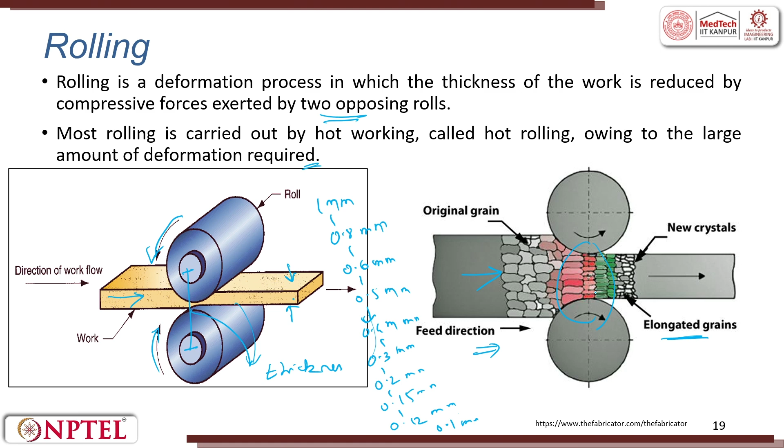This is the deformation zone. When the material comes out, you get elongated grains, and new crystals also get formed.

In rolling, the material is pulled by rotating rollers and simultaneously squeezed between them. So there are two actions: pulling and squeezing.

Hot rolled metal is generally free of residual stress and has isotropic properties. The disadvantage of hot rolling, as we've seen, is that you cannot get very close tolerances, and there's a possibility of oxides forming.

Why do we talk so much about this? Because the oxides that form are brittle in nature, and they form on the top surface. Since the oxides are brittle, the next time you try to roll this material, the oxide layer will easily crack, and this can scratch both the roller and the workpiece. So oxidation scales should be avoided.

This becomes very common when we start working on hot rolling. For steels, the desired temperature for rolling is around 1200 degrees Celsius.

The heating operation is called soaking, which we saw in the previous chapter on heat treatment. The furnace in which this is carried out is called a soaking pit. Blooms, slabs, and billets are different types of workpieces produced in this process.

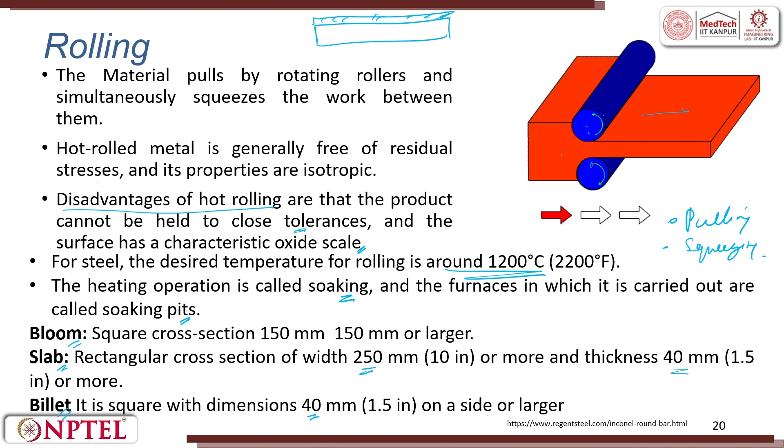So this is a bloom, this is a slab, and this is a billet. From this, by a rolling operation, you can try to produce I channels. We can try to produce railway tracks. So how do you do that? If you try to do the cross section area...

This is the roller. When you look from the side, this is how the roller looks like. When we look from the front, you will see they will have something like this, the roller. So this will try to bring this structure. The roller cross section is changed so that you try to get the required output.

In slab, it is straightforward. So rails are made from bloom by a rolling process. Then from slabs you can make coils, plain sheets, all these things. Billets are used to make bars and rods.

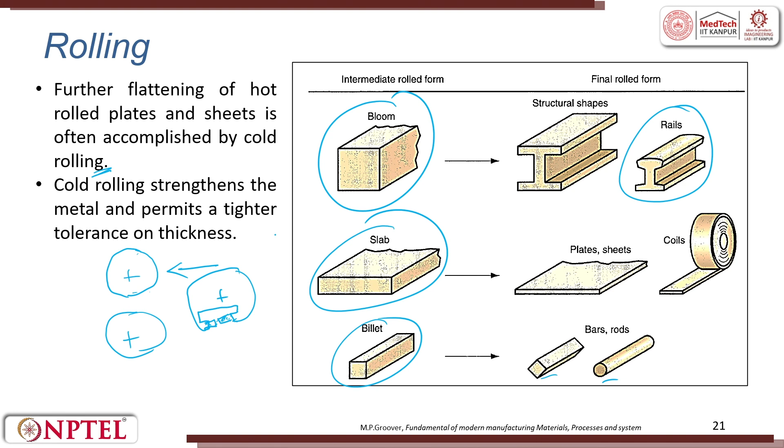Further flattening of hot rolled plates and sheets is often done by cold rolling process. Major change in shape is done by hot rolling, and then further you can do it in cold. So cold rolling strengthens the metal and permits thinner, tighter tolerance on the thickness.

Rolling did not happen just now, it has a history. The rolling of gold and silver by manual methods dates from the 14th century. Leonardo da Vinci designed one of the first rolling mills in 1480, but it is doubtful that his design was ever built. Around 1600, the cold rolling of lead and tin was accomplished by manual operation of a rolling mill. In 1700, hot rolling of iron was being done in Belgium, England, France, Germany and Sweden.

In Europe, it typically happened that these mills were used to roll iron bars into sheets. In the modern rolling practice, dated 1783, a patent was issued in England for using a grooved roller for producing iron rods or iron bars. The Industrial Revolution created a tremendous demand for iron and steel, simultaneously driving the development of the rolling process.

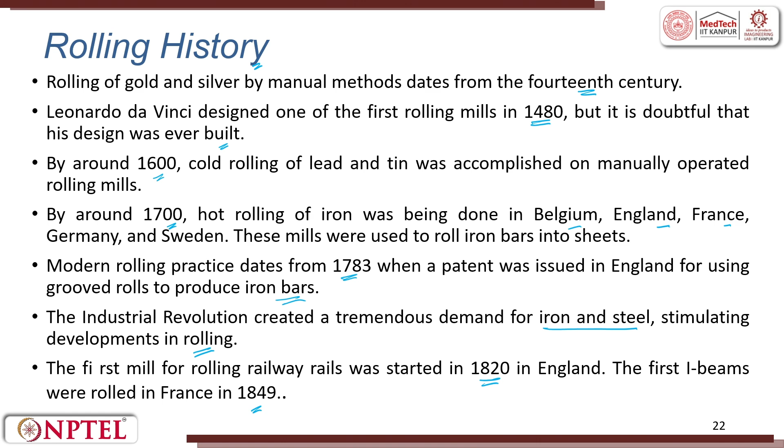The first mill for rolling railway rails was started in 1820 in England. The first I-beam was rolled in 1849 in France. So you see casting had a very long history, starting from BC and continuing into AD, but rolling started with evidences only in the AD period.

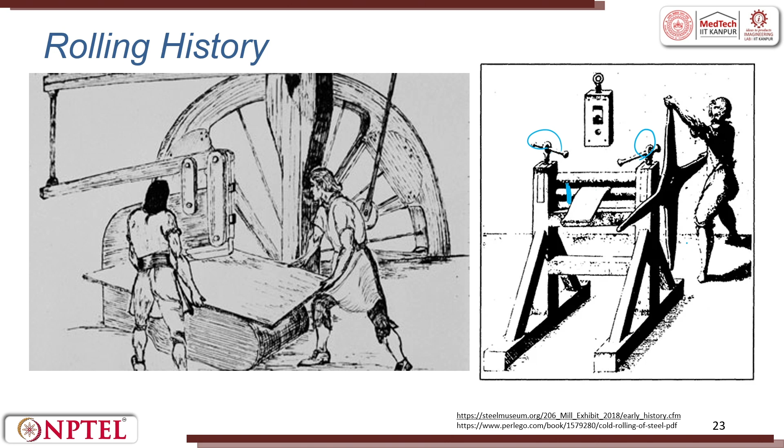So this was the initial roller which was there, and this is the little advancement we have. So you had a flywheel. This flywheel is rotated to give a huge impact. So that is done, then rollers were also developed. Even today, when we want to do sheet bending operation, we have these two arms which can reduce or increase the spacing here, and then we try to apply load manually and get the output done.

When we talk about flat rolling, it involves the rolling of slab and sheet. So this is a roll, this is the input material height, this is the width. V naught is the velocity with which it is pushed inside, Vf is the velocity with which it comes outside. H naught is transformed into Hf, W naught is transformed into Wf. So the moment there is a reduction in the thickness, there will be an expansion in the width. V naught and Vf will not be the same.

When we try to look at further details, this is the roll we have, which has a radius of r. The velocity with which the roll rotates is called Vr. And there is an angle which we have marked here, this is called the bite angle.

Bite which chews and pulls it inside, the bite angle. You can see here there is an entry zone and an exit zone. Here you can see tensile and compressive loads being applied at this point. The distance from the entry to the exit zone is called the rolling gap L. In between, from entry to exit zone, you have a point called the no slip point. So, entry zone, exit zone, no slip point, and then you have a rolling gap of L.

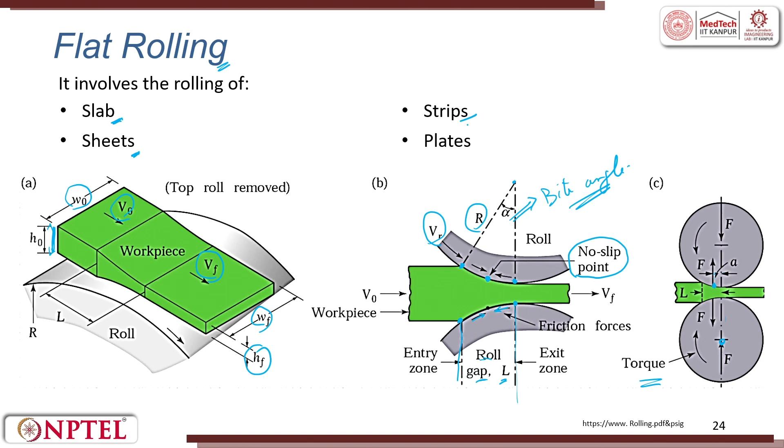Let's do a little analysis. In flat rolling the work is squeezed between two rollers so that the thickness is reduced, and the amount of reduction is called the draft. Draft D is nothing but T naught minus T final, where T naught is the starting thickness and T f is the final thickness. The draft may be expressed as a fraction of the starting stock thickness, so it can be in terms of a reduction R, which is D by T naught.

The increase in width of the work by spreading is called W. We have seen everything here: theta, the rolling radius R, the bite at this point called the neutral point, the roller pressure with which it enters is called P, and then you have a contact length L. The velocity of the rolls is Vr, the velocity with which the component goes inside is V naught, and T naught, TF, VF.

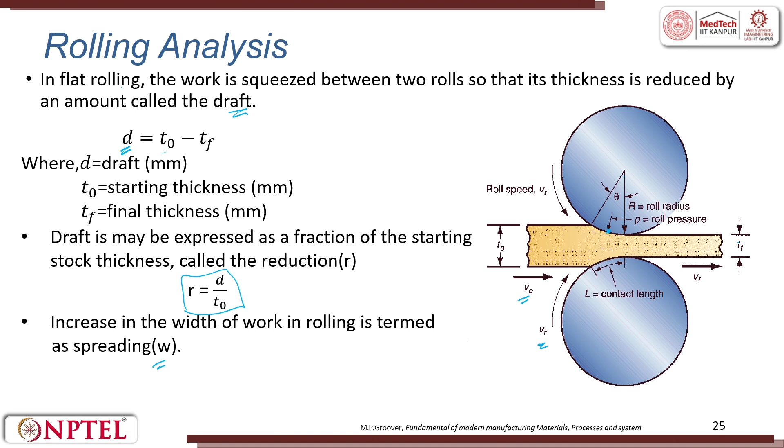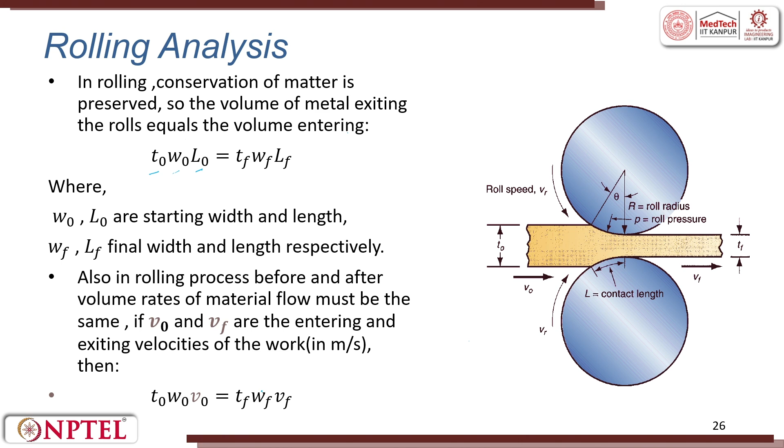Theta is the arc angle made by the roller with the workpiece. R is the radius of the roller, Vr is the surface velocity. V naught will be lesser than Vr, which will be lesser than Vf. At the no slip point, known as the neutral point, the velocity of the work and the roller is equal on either side of this point. The slipping and friction occurs between the roller and the workpiece.

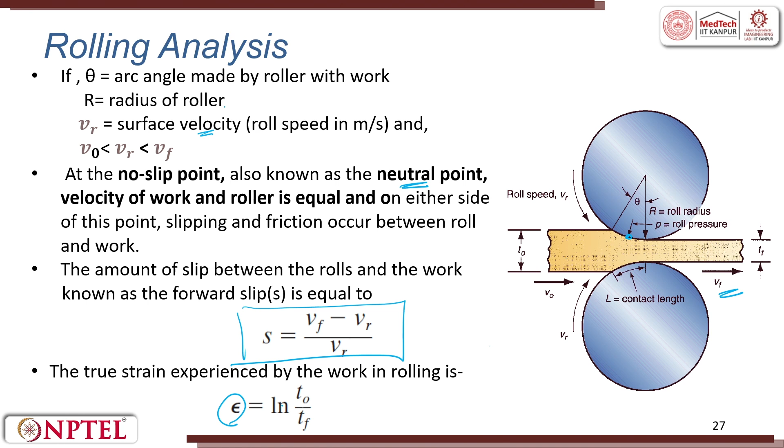The amount of slip between the roller and the workpiece can be evaluated by the forward slip, S, which equals Vf minus Vr, the roller velocity, divided by Vr. The true strain experienced by the work in rolling is strain equals natural log of T naught by Tf.

When we talk about rolling analysis, the friction force in rolling on the entrance side is always greater, so that the net force pulls the work through the roller. So friction force at the entrance side is greater - this is an important point. That's what allows it to be pulled through.

There is a limit to the maximum reduction you can have. D max, the maximum draft reduction in one shot, is equal to mu squared into R, where mu is the coefficient of friction and R is the roller radius. This equation indicates that if the friction were zero, the draft would be zero - it would be impossible to accomplish the rolling operation. So if the friction force is zero, if I put lubricant and bring it to zero, then D max will just slip and nothing will happen.

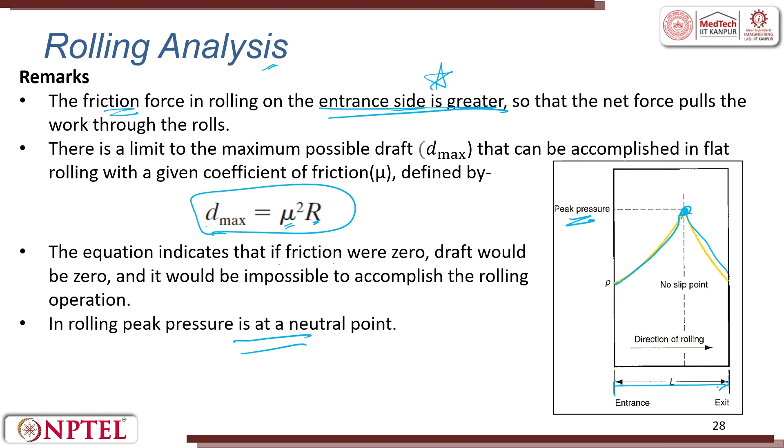The rolling peak pressure is always at the neutral point - this is also very important. At the no slip point, the peak pressure, the rolling pressure, will be very high. This is L - what is L? Start to L, this is the rolling gap that we saw, this is gap L.

So, what are the outcomes? If for a given coefficient of friction and rolling pressure in MPa sufficient to perform rolling, force F is required to maintain the separation between the two rollers. So, F is nothing but W times P, the pressure applied for a small L delta L length.

L is the contact between the roller and the work. Y average is the average flow stress. W is the width of the thing. So, the rolling force can be calculated as average flow stress, which you have seen the formula earlier, width into L. So, here the contact L can be figured out as root of R times T naught minus Tf.

So, the torque will always be 0.5 times F into L. It is a simple calculation. You can try to find out what will be the torque force required for a roller to be given such that it can try to deform.

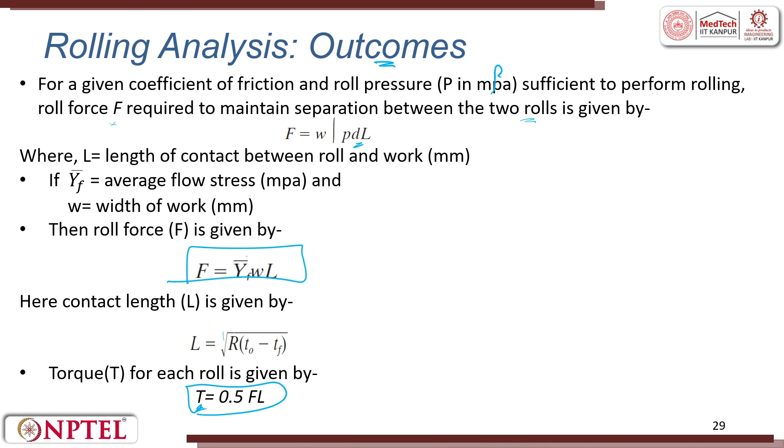So, the power required, we know the torque, from there we calculate the power. So, the power required to drive each roller is a product of torque and the angular velocity 2 pi n. So, the power for each roller is 2 pi n T, and as the roller mill has two powered ones, the power is equal to 2 pi n F L. So, n is the rolling speed. With this, we can figure out what power you should apply for a rolling operation to deform from this thickness to this thickness.

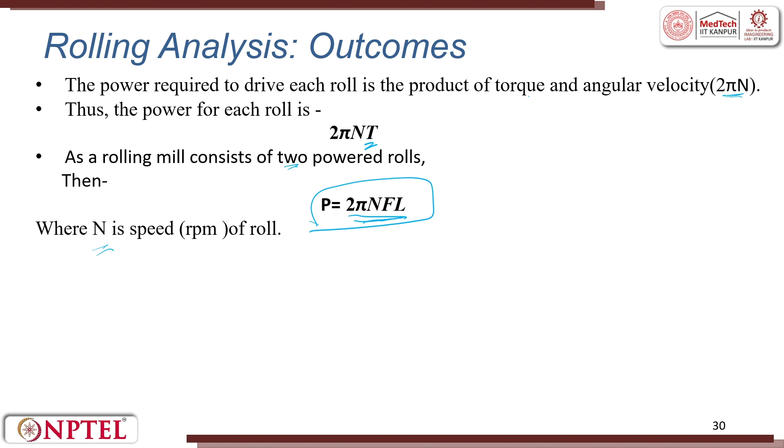As I told you earlier, the reduction cannot happen in one shot. So, what we do is we try to have these rollers in multiples. So, when these rollers are kept, the place where they are kept or the machine is called a rolling mill. Various rolling mill configurations are shown for various applications.

So, in order to see the friction, the draft is equal to mu into R naught. So, there is a limitation on the reduction of this R naught, which is the roller radius. So, that is why we also try to reduce the roller radius, so that you get a draft reduction.

So, the rolling mills can be 2-high, 3-high, 4-high, or a cluster of mills, or tandem - this is called tandem mills. Increasing the rolling mill increases the total force read on the forming sheet.

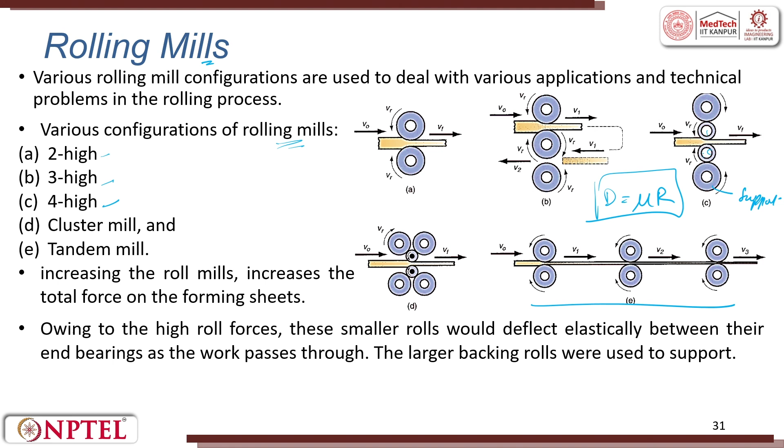Owing to the high rolling force, these small rollers would deflect. So, we have supporting rollers on the back. That is what these rollers are called, supporting rollers. Same way here, these are also supporting rollers.

The rolling process can also make threads. So, in the die, if you have these threads made, a screw is kept there and it is just rolled. So, rolling need not always be cylindrical, you can also make flat ones. If the geometry is given, you roll it in one shot and get the output, a finished piece. So it is used to form threads on cylindrical parts by rolling between two dies. It is also used for mass production of external threads. This is thread rolling.

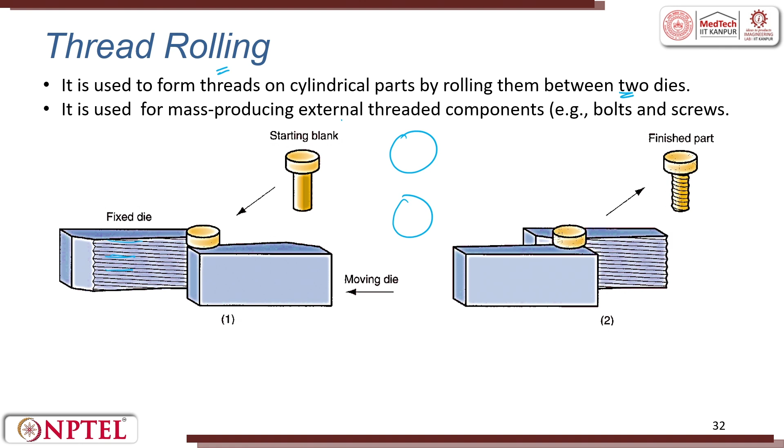High strength rings which are used for aerospace applications are made by ring rolling. It is a deformation process in which a thick walled ring of smaller diameter is rolled to a thin walled ring of a larger diameter. Ring rolling is a very interesting process with a lot of applications. In boilers, the rings are also made out of a ring rolling process.

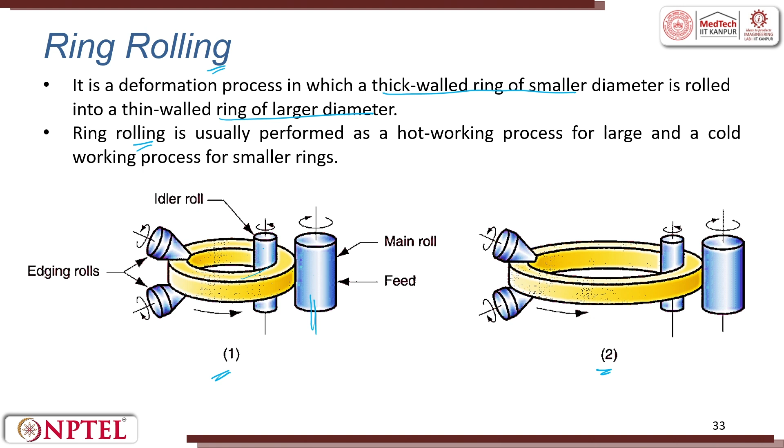There is also a ring piercing process. If you want to use rollers, pierce it and form a tube, this is the starting material. You have a mandrel which pierces it. This piercing will try to bring in a tensile load, and this will try to have a compressive effect on the top.

So here a crack will be formed, and you'll try to have a hollow shape. The roll piercing process is a specialized hot working process for making seamless thick wall tubes.

Seamless tubes are tubes where there is no seam. If you take an ordinary sheet and roll it, you'll have something like this, and then finally you try to weld it. So these are seamed tubes. Seamless tubes are done by a rolling process, where two rollers moving in opposite directions are used, hence it is grouped into the rolling process.

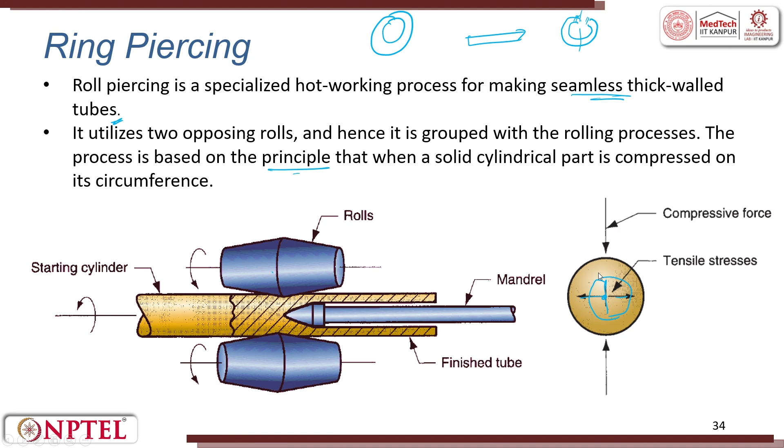The process is based on the principle that when you squeeze it, there is compression, and at the center there will be tensile stress. So you push a mandrel, and it tries to form a pipe. You can also have other applications, corrugation can also be done.

But rolling is not straightforward; it produces a lot of defects. In appearance it will look like this. This is called center buckle.

If the cold or hot rolled mill has too much crown, the mill will roll out and have a center buckle. This is a waviness created because of residual stresses. The fiber at the edge is longer than at the center, so it tries to create waviness. These are some of the defects which come out of the rolling process.

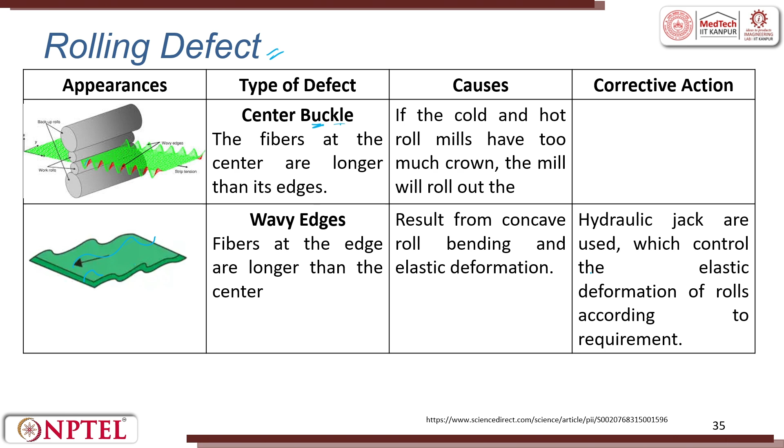In appearance you will have this, these are bed leveling and these are edge cracking. Because there is not sufficient material, there will be tensile and compressive forces, so you get edge cracking.

The length of the fibers increases from one edge to the other, so it is almost like a taper. This is bed leveling, and this is edge cracking. So these are the defects, these are the causes, and these are the corrections which are made.

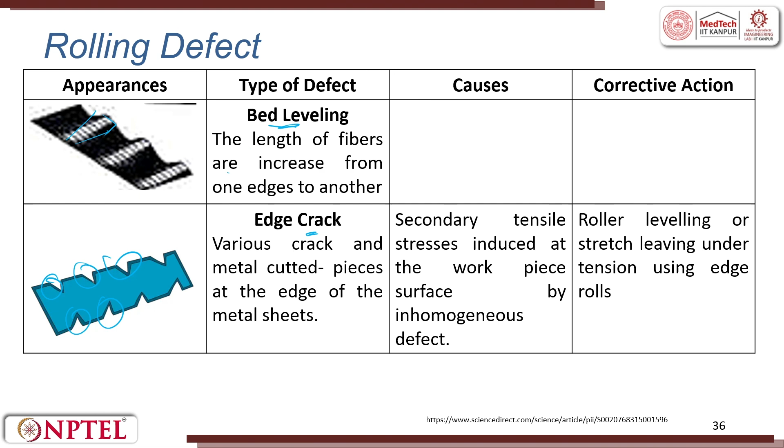You can also have zipper cracks, which are cracks seen all along the line, and you can also have something like an alligator crack. So the contact is there, and once it rolls and comes out, it forms a crack like this. These are all due to improper stress-strain application, or process parameters like velocity and roll pressure.

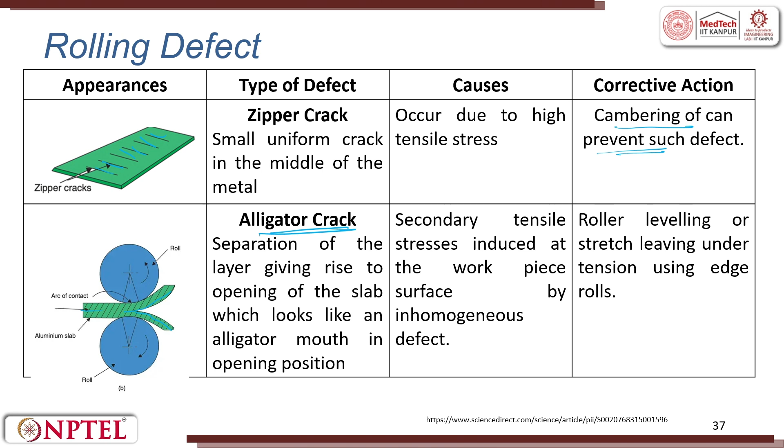If we start optimizing this, we can try to reduce it. The camber on the roll prevents the defects. These are center splitting, this is alligator crack, and this is center splitting which can happen.

To recapitulate friends, in this lecture we saw what is forming, then classifications and mechanisms, process in forming, what is the rolling operation and rolling mills, rolling analysis, outcome analysis, operations of rolling, and rolling defects. This should give you a very good idea about the rolling process in metal forming.

I am going to give you a simple job to do. Please take some dough and then take a roller. If I put the side view of a roller, it will look something like this.

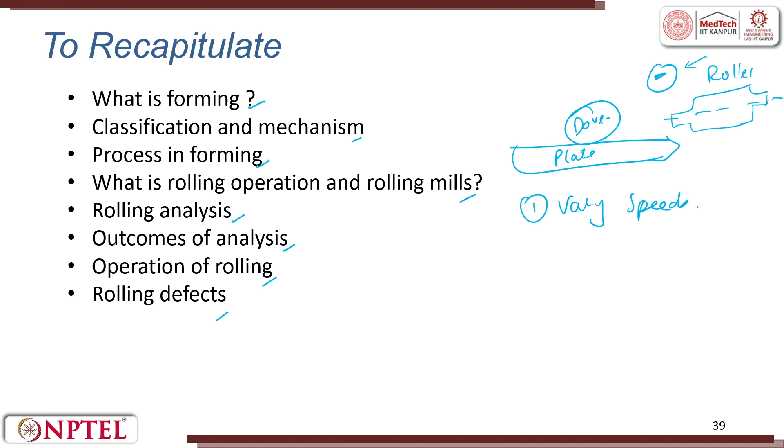This is a flat plate, this is the dough. Now you take the roller. You will try to vary the speeds of rolling, faster, vary the roll speeds by 3 levels - whatever is possible at your level.

Next, you will try to make some grooves on it, and then roll at 1, 2, 3 speeds. After every pass, try to measure the thickness using your smartphone, from the side area.

You can try to take the thickness, and also take a photo from the plan view or from the top. You will see several different shapes getting formed. These shapes are nothing but defects, and once you do this exercise, you will have a perfect understanding of what the process parameters are and how they affect the raw material.

You should also try one last example: when you do this with dough, first give a powder coating on the flat plate, and next do it without a powder coating - one with powder coating, one without. See what happens to the surface. When you do this exercise at home, you will completely understand and appreciate the rolling process.